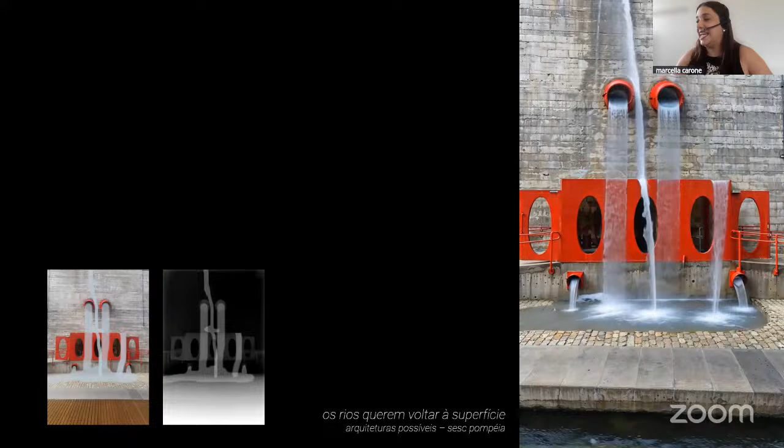I went there to Sesc Pompeia, I took this picture, and I tried to modify on top. So always related to the context. And at the end of last year, I started thinking, how can I express myself through those images and videos?

So Sesc Pompeia is built on an area that used to be a river, and it's an area that floods today. So those red tubes on top, they are for ventilation. But I was thinking, what if water comes through them, like the rivers want to come to the surface? And I started building some of those images and videos.

And I was really, really focused on how to get consistency, because I know that consistency is a difficult thing to do in AI if you work with single images. So how to do this? And it was really nice for me because I was using ComfyUI and ControlNet, where I can extract information from the photos, but I can draw those maps as well. So I was drawing where the water needs to be for me to render it and have the video.

But at some point last year, I was thinking, can I really design with AI? In that moment, I was just working on top of other images and trying to express myself, understanding the tools. But I was thinking, can I design something, not just ideas, but can it be true, going from the digital to the physical world?

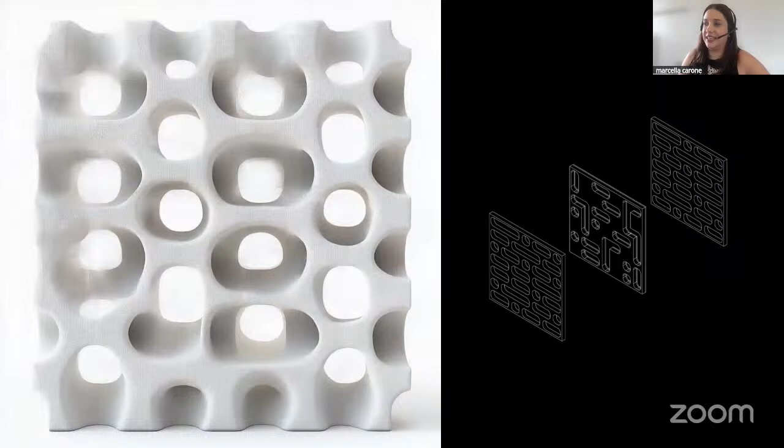So I can give some commands. I can put my ideas and my references here. They are not generic, but I'm not 100% controlling the design. I can get ideas from it. So this started evolving for me, and I got back to Rhino in a more traditional way to understand how those elements can be combined, where I can get openings and closings,

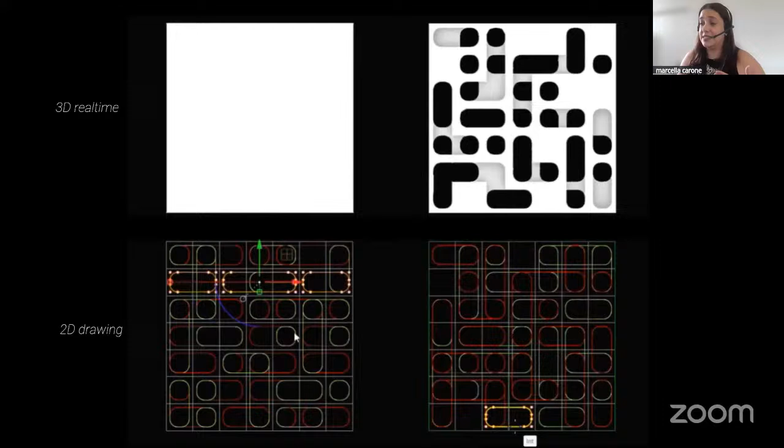and to have a super straightforward algorithm, so I can design and see real-time 3D at the same time. You can see the red lines and the green lines. I was drawing the front and the back at the same time to get real-time 3D of my cobogós, even seeing the percentage of the openings and everything. So I could get a range of different designs and combinations.

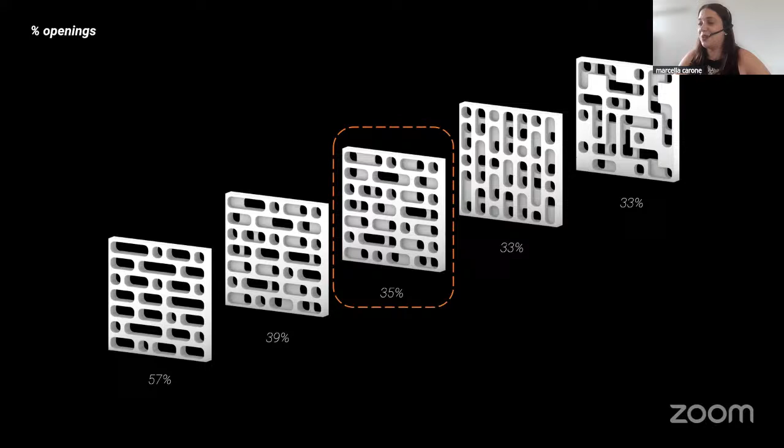And I'm going to show you here, I have the prototypes. This is work in progress, but I have the prototypes. I have many of them. They are in scale here. But there is one thing related to this for me: I can touch the design. It's not just an image. So I can evolve from it and really work on it. I'm going to get just this middle one, 35% opening. So I can go even further.

I can have solar analysis of it. I can really test this material digitally, to understand the incident radiation of the material and the luminous performance related to, in this case, the São Paulo climate. So I can see that I can reduce the incident radiation by 3 times, but at the same time, I can have the light come through it. So it's a powerful element. And for me, I was thinking of a novel way to do it.

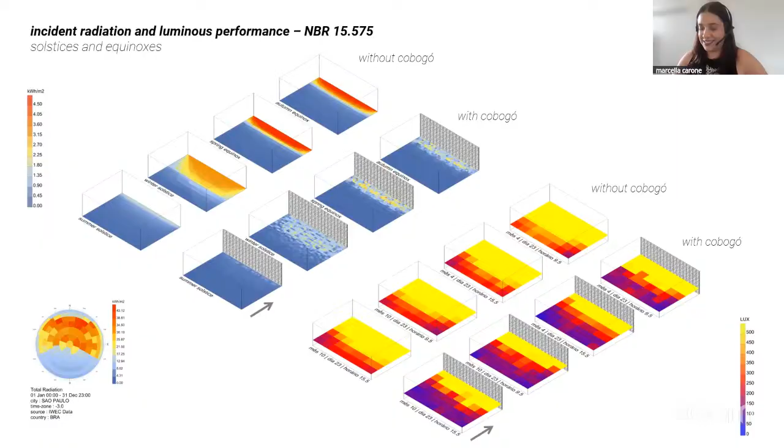And for me, this workflow process with AI is fascinating because it's not going from the beginning to the end; it's like a dialogue between me and the machine. All the time we are talking, and when I got the design, I put it back into AI to have the lines, and then into Rhino, to get into the real project. So I can express myself,

and it wasn't a super fast workflow. This is really good to say, actually, because people think that it's super fast. Okay, it's super fast if you have the workflow. But I was trying to put in my original workflow of creation as well, being a hybrid creative.

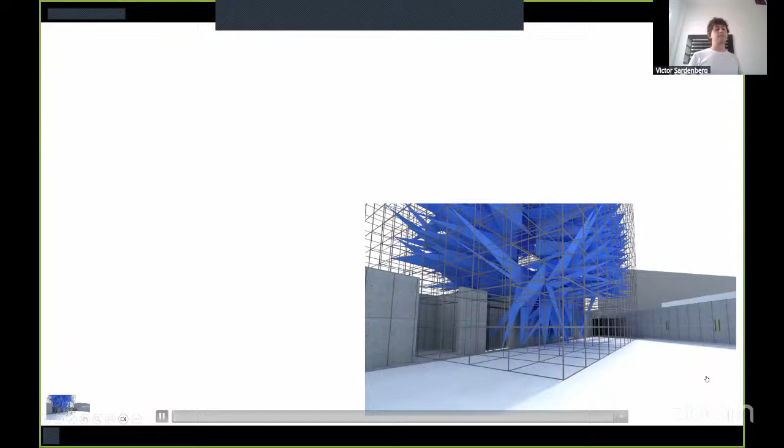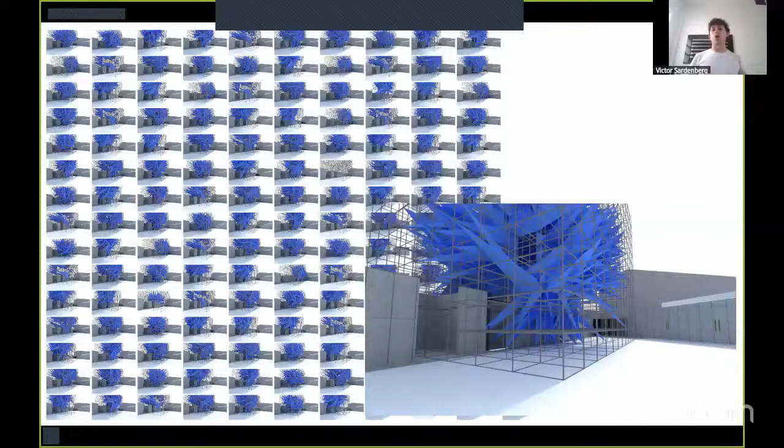And this interest started to me because in the last decades, it became very fast and cheap for architects to produce hundreds and thousands of variations of designs. And then the question arises, how do you choose among all these almost infinite options? So traditionally, architects have been using quantitative methods to rank designs and navigate this design space of all possible solutions.

And if you fit the existing criteria to the good and old Vitruvian triad, you can see that all of them, or most of them, fit into firmitas, which is related to structure, or utilitas, which is related to the use of a building. However, there is a very important question, which is in the core of architecture as practice and as discipline, which is how something or an environment is perceived by its users, which is related to venustas, that is aesthetics, how we perceive the world. So it's necessary to develop methods to quantify aesthetic preference.

There's a long tradition of people trying to do it in something that is called empirical and quantitative aesthetics, from Fechner, a German physicist from the mid-19th century, until nowadays. Someone that is especially interesting for me is Birkhoff, who in 1933 developed the first formula to quantify and compare aesthetic objects like poetry, music, and objects. And nowadays, there's a resurfacing interest in aesthetics that emerged from the combination of contemporary computational techniques applied to visual perception in a new field that is called computational aesthetics.

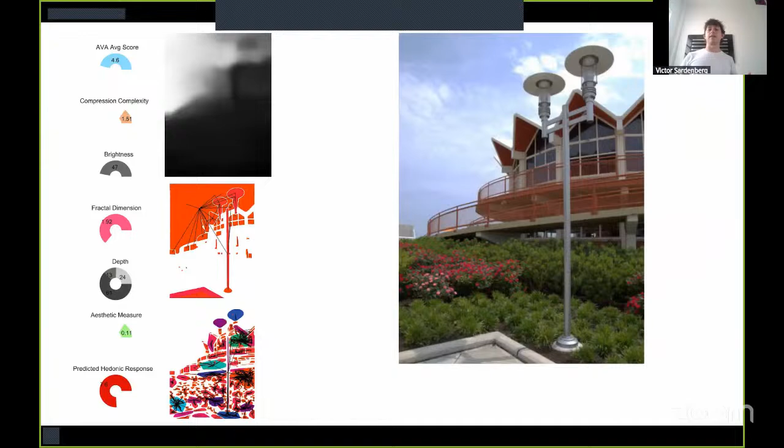So here's a nice definition. Computational aesthetics is the research of computational methods that can make applicable aesthetic decisions in a similar fashion as humans can. So here is an application of many computational methods into a large database of architectural images. It's applied to AVA, which means Aesthetic Visual Analysis Dataset. It has 255,000 images, and it's a very good dataset because it also contains the aesthetic score, or how people like or dislike each image. For architecture specifically it is 16,000.

So here are some computational aesthetics methods applied to this dataset, like compression complexity, the brightness, the fractal dimension of the image, the depth of it, the number of parts, their connections. And on the bottom, there is a neural network that I trained that is called the predicted hedonic response model. This model is a large neural network that uses as inputs some computer vision or computational aesthetic methods like brightness, depth, fractal dimension, number of parts and connections. And in the output of it, there is a predicted hedonic response. A hedonic response is a response of liking or disliking something. So this neural network is able to predict how people like or dislike architectural images.

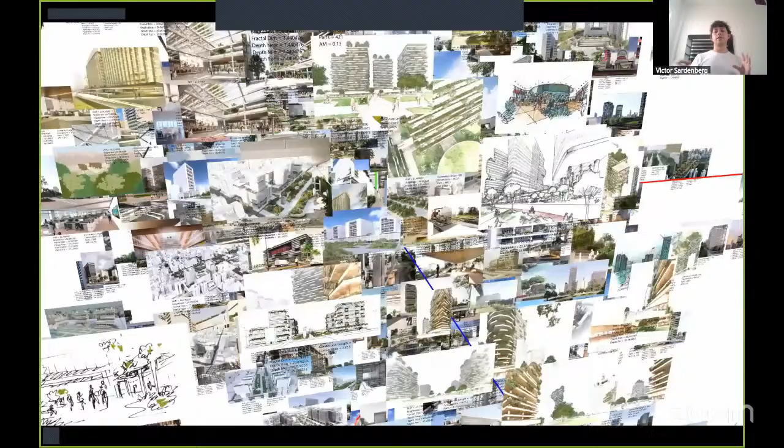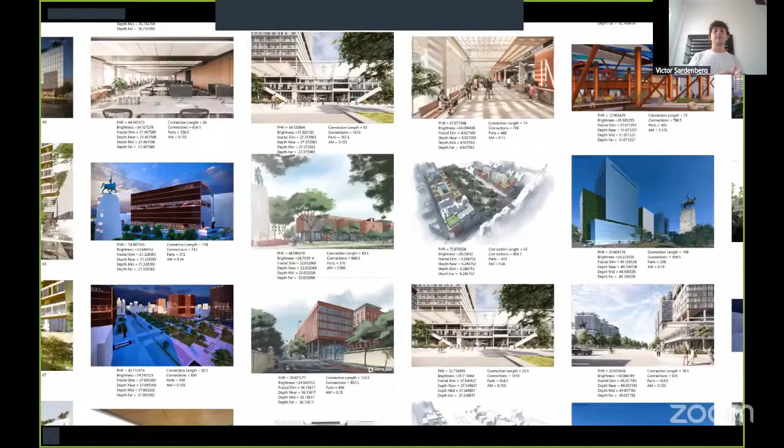So I use all these 14 criteria, and I use PCA, which is an analytical method to flatten 14 dimensions into 3D and 2D. So this is a map that clusters images that are similar and moves away images that are dissimilar. These are 600 perspective images for the competition for the new headquarters of São Paulo government in Brazil. And it forms a very large cluster in the center, but there are in the periphery some different designs. Here is a different visualization that puts all images in a grid, but still organizes them according to their aesthetics. So this is a way to understand the different aesthetics that are being applied in a design space, for example, in this case, a competition.

But something that I realized is that this large cluster in the center is formed because most of the images being submitted to this competition have the same aesthetics. These are the 6 finalists of the competition.

And you can see that although the designs are very different, the aesthetics of the image, they are all very similar. They all belong to the aesthetic category of the beautiful. It's always this beautiful green grass, this very nice blue sky, some happy people, there is some specific brightness, specific camera composition.

So it made me feel like in other aesthetic practice or other arts, like movies, if you go to the cinema, you can see that there are many genres of movies, from horror to comedy, from antique movies to sci-fi, from tragic to comic. Or if you look at music, you have from heavy metal to bossa nova, from drum and bass to minimal, there are many different aesthetics.

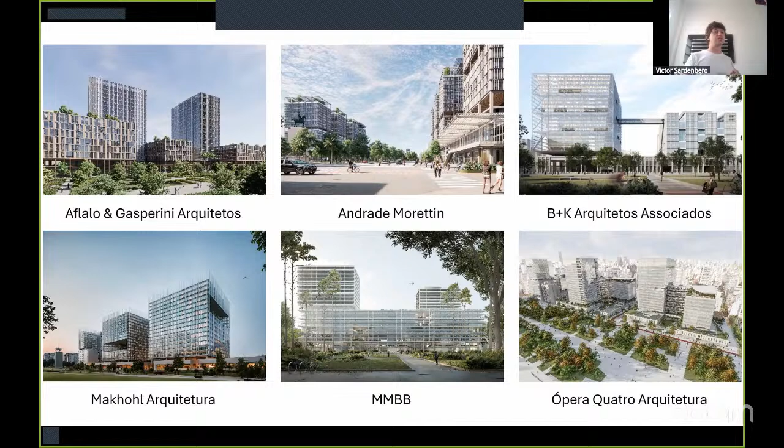But it feels like architecture, especially in the mainstream, has been producing only one aesthetic category, which is the beautiful. And I suspect that it happens also because software for rendering comes with templates of this kind of image, the beautiful photorealistic image. And it pushed towards this direction of the beautiful. So I started to research the following question: can the current AI models explore aesthetic categories beyond the beautiful?

So in the last AA workshop here in São Paulo in July, I had the opportunity to learn Stable Diffusion and ComfyUI better, and I started to apply it in this research. So this is one of the images from this competition. This is designed by Makhohl Arquitetura. And I extract the depth of this image and the lines that define the composition. And I start to ask, can you make a beautiful version of this foyer?

Can you make it comic, or what it looks like if it's a cool foyer, or a cute foyer, or a glamorous one, a grotesque one, an interesting one, a kitsch one, a maximalist or minimalist. Here is a picturesque, here is quaint, sublime, surreal, tragic, ugly, and finally zany. So as you can see, the AI model is able to produce these existing categories that are popular, or not so popular, in other fields, but not in architecture.

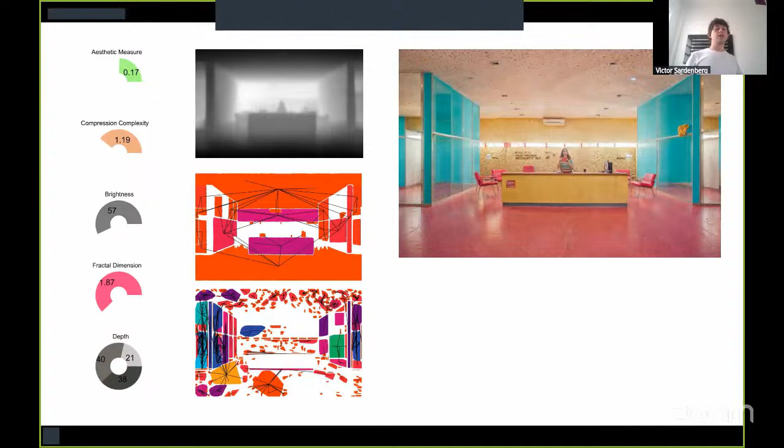And you can see that some regions of this map are very well populated and other regions are less populated. And this is what I think is more interesting in this map: not to check the regions that are full of images, because these regions are populated by images that have the aesthetic categories that we are already familiar with, like the sublime, the grotesque, the beautiful. But there are also many regions that are empty. And this is the next step of my research.

How can I populate and find new aesthetics, new sensibilities that are unique for our time. And I think this is especially interesting to do with artificial intelligence because it becomes an act of co-creativity. I'm creating together with the model. And it's possible to produce new aesthetics, synthetic aesthetics that we still have no names for. We still don't know how they look. So the next step is to find these new, uneasy, unexpected, maybe uncomfortable, new synthetic aesthetics.

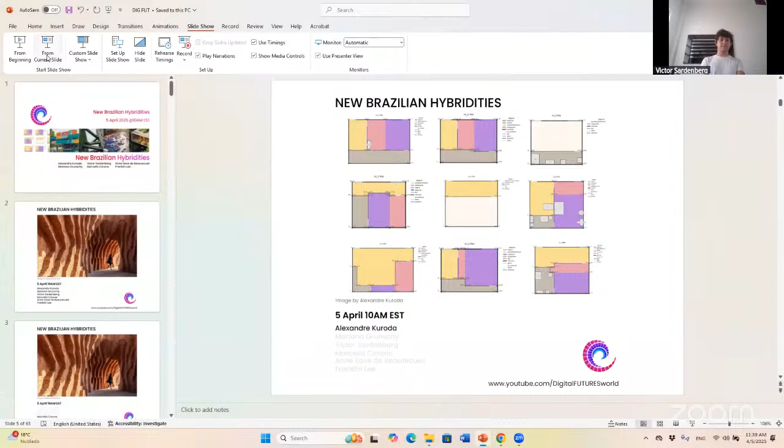The next speaker will be Alexandre Kuroda, who's the founding partner of ArcGen. He holds a master's degree from the DRL, the Design Research Laboratory at the Architectural Association, where afterwards he worked for Zaha Hadid, working on parametric design on these amazing facade systems and structural systems for her buildings. And he also worked for KV Arquitectos. He was an undergraduate and postgraduate professor at the Faculty of Architecture, Belas Artes. Actually, I think you founded the amazing new master's program there that was focusing on parametric design. And he's been a speaker at events such as XSW, the Bartlett, and KEA.

ArcGen, I think, is a fascinating practice that he's created that establishes a certain critical contextuality in transforming static urban planning regulations and interior area requirements to create this dynamic form generative process. So we're excited to hear more about your work, Alex.

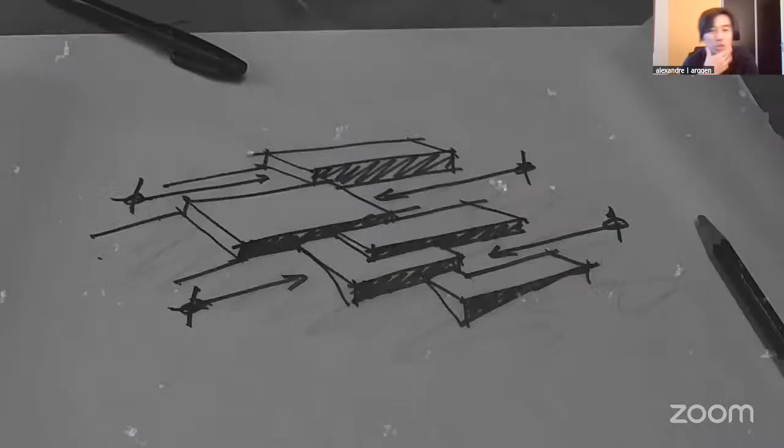I want to start this presentation by presenting something that we architects already know. We architects traditionally solve everything on trial and error. All of this to test all of our intentions for the projects in plans, sections, elevations, and perspectives, at the same time complying with all the accessibility, urban and environmental restrictions. We grill our minds thinking and drawing by hand or digitally in AutoCAD or BIM. So traditional architectural services are very manual, inaccurate, bureaucratic, and slow.

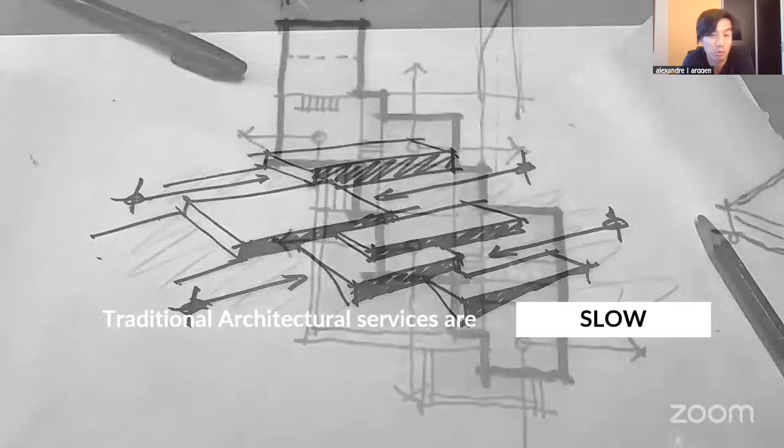This is a colossal problem for retail and real estate companies that need these projects with speed and quality to meet their business demand. That's why we automate architecture and urbanism design, custom made to our clients via AI and generative design algorithms that we developed here with our team. We've got two main solutions for our clients.

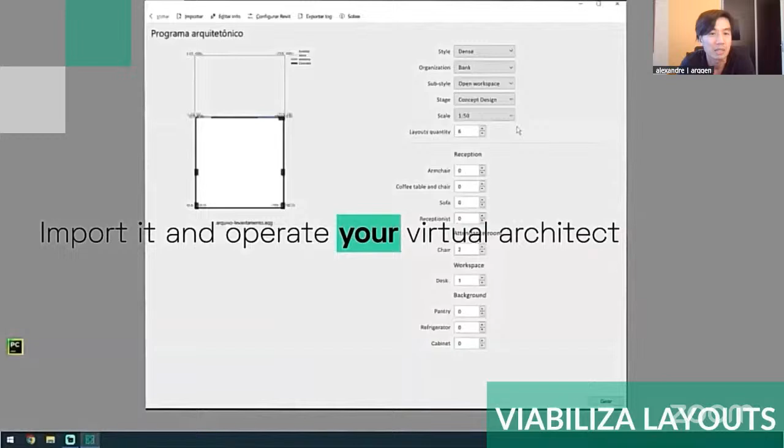The first, Viabiliza Layouts, came to light from the pain of approving architectural layouts. And this is how it works. It all begins by importing the building survey and then defining the design style and the architectural program. That is, for example, for a bank branch, the quantity of managers, the back office furniture, waiting chairs, and then in one click, launching our solution that conceives all the possible layouts for these sites.

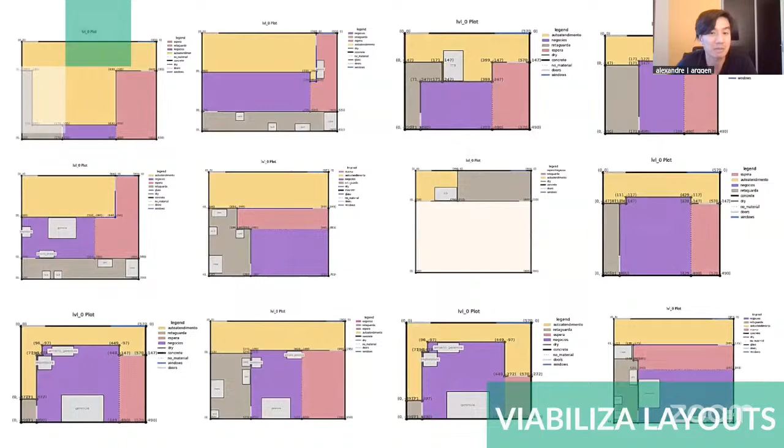All the design options are presented and ranked according to the client's criteria, complemented with all the metrics needed for the users to always make the best possible choice, and exporting the selection in PDF, AutoCAD, or BIM. Our software is agnostic. We integrate with the main applications used in the market.

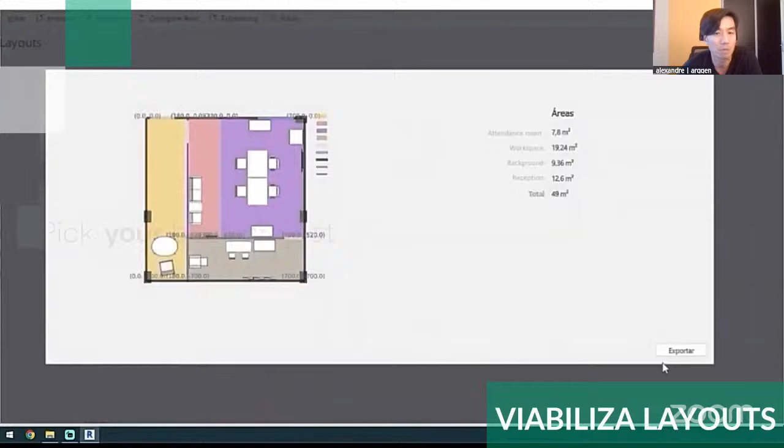Revit, for this client, means that beyond all the benefits of the BIM model, it is obviously a 3D model that allows for an easier comprehension of the design presented, also including the automatic generation of the drawing sheets with plans, tables, and dimensions, therefore delivering the projects in a complete schematic design stage.

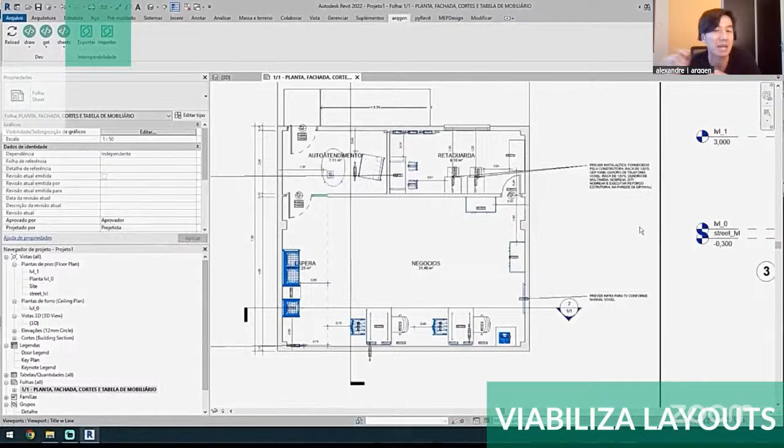One of our clients has reported an approval time reduction from months to less than a day, an increase in the quantity of design options to more than 10, while, as we know, a traditional architect will deliver 2 to 3 options and will charge if you ask for more, because obviously it demands a lot of work, and savings of millions due to their more than 4,000 branches here in Brazil alone.

Our second solution is Viabiliza Terrenos, that came out of the pain of approving test fits for residential, commercial and warehouse buildings in their plots. It all begins by importing the site survey and then choosing all the urban and environmental restrictions such as setbacks, GFA, GIA, building heights, and the architectural program from our clients. We customize our solution with our clients' characteristics, that is, their apartments, their accesses, amenity areas, car park, and then with one click, starting our solution.

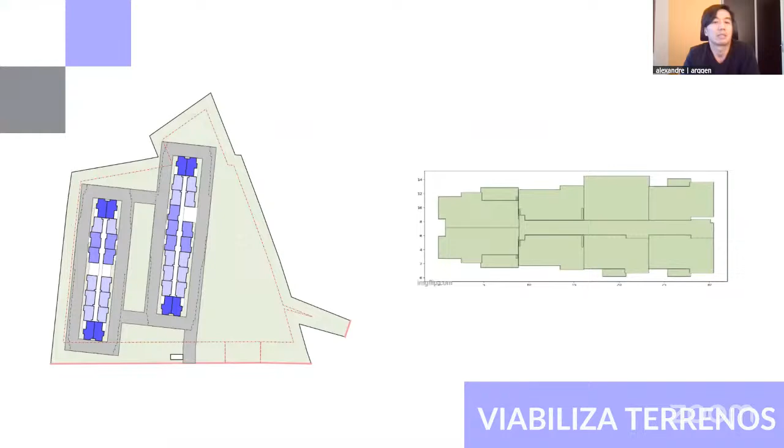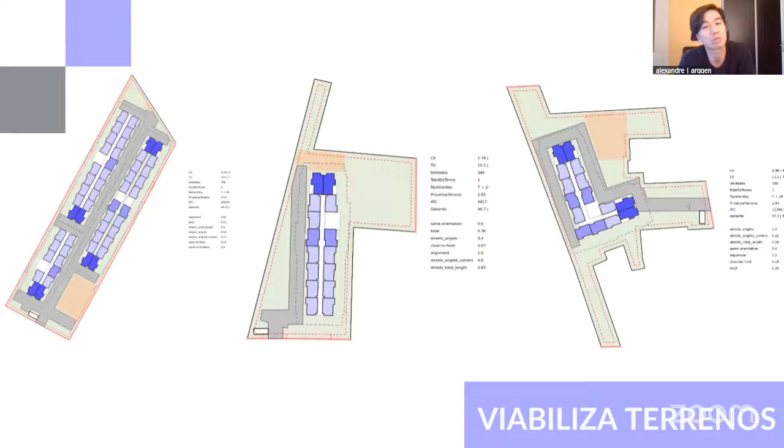Here, our solution is positioning residential towers and varying the typical floor. And here in different site conditions. And just like Viabiliza Layouts, delivering all the best design options possible. Once the user chooses, he or she downloads the options in the format that he or she works in.

And one of the Viabiliza Terrenos clients has reported a time reduction from days to a few minutes, an increase in design options to more than 5, and also an increase in the scores of 5 points on average compared to the projects already developed, during the POCs that we have developed with them. This is only possible with our team.

Myself, one of the Arqgen's co-founders, I'm the Chief of Innovation in the office. I have my master's degree from the Architectural Association, from the DRL, as Anne said, and worked at Zaha Hadid and lectured here at the Belas Artes School of Architecture, together with Thomas, my partner, the current CEO. We both graduated here from Mackenzie University, where Marcella and Victor also did, where also Thomas got his master's, and a team of 30+ architect developers, computer scientists, AI, sales, and marketing specialists, all of them very passionately committed to overcoming this colossal challenge.

We are also recognized by our partnerships. We are financially supported by FAPESP for PIPE Phase 3 and FINEP. We are technically and commercially supported by Autodesk. On the AI tech side by NVIDIA and AWS. And by our investors. We are now 1.5 years into the first round of seed investments. And last but not least, our dear clients, among them Bradesco and Itaú, one of the largest banks here in Brazil, users of the Viabiliza layouts, Cury and Direcional, top-notch real estate companies here in Brazil.

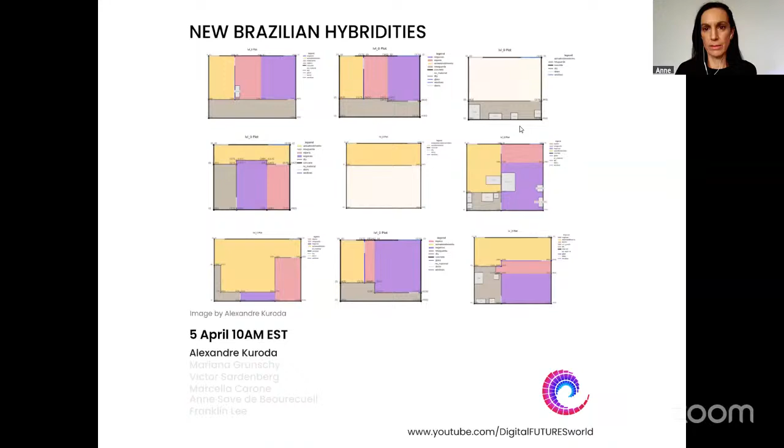And so our final speaker is Mariana Grunschy, who we were introduced to in preparing the Architectural Association Visiting School program. She was potentially going to participate as a student, but we discovered that actually she has a lot of experience using AI. She has over 20 years of experience with architecture, design, and immersive brand experiences with her company, Soma Creative Studio, working with commercial spaces, events, and temporary installations. She has an interesting dual degree in both graphic design and architecture from the Faculty of Architecture of the University of Porto in Portugal.

Thank you so much. Good morning. Thank you so much, Anne, for having me here. Also, Neil. Sorry, are you seeing my screen well? No, hold on. Let me stop sharing this one and share the other one. Are you seeing my notes also, or just my slides? Okay, I will share in another way. I don't want to show you my notes, only my presentation. Now you can't see my notes, right? Okay, that's it. So thank you, Anne, for having me here. Thank you, Neil, also.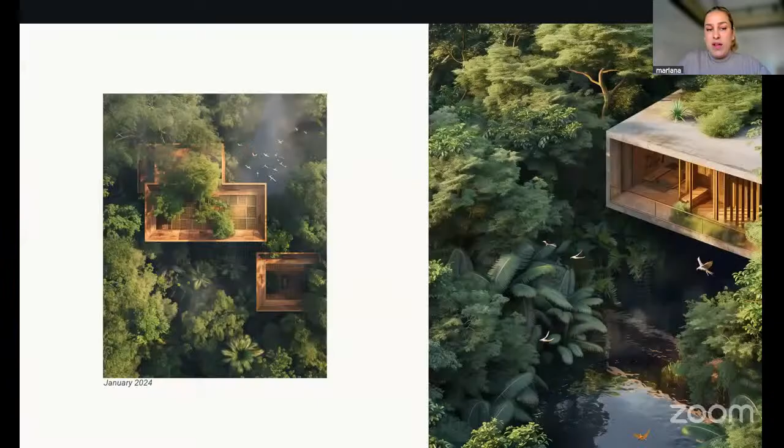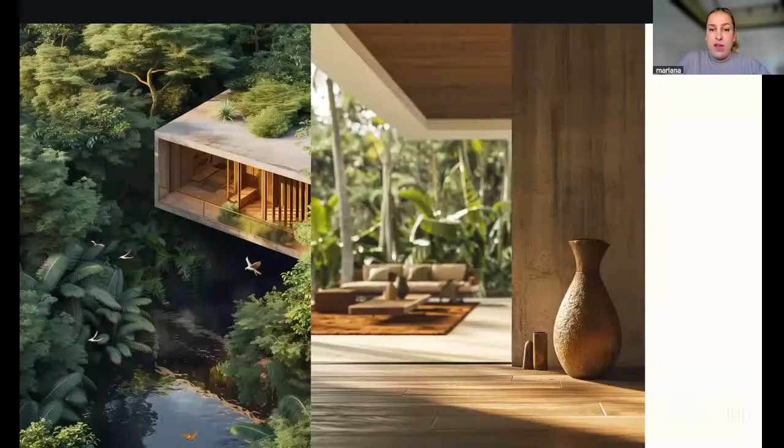So back in 2024, I started to do an Amazon AI series, and I would like to present Brazilian architecture inside the nature, different from other images I was seeing at that time. I was not seeing a lot of ways to show Brazilian architecture. And these houses I did in January last. They are open, very open. They have exposed concrete. They have ceramic. They have indigenous art. I was not able to see that kind of projects in artificial intelligence, because I was only seeing European and American ways of making architecture.

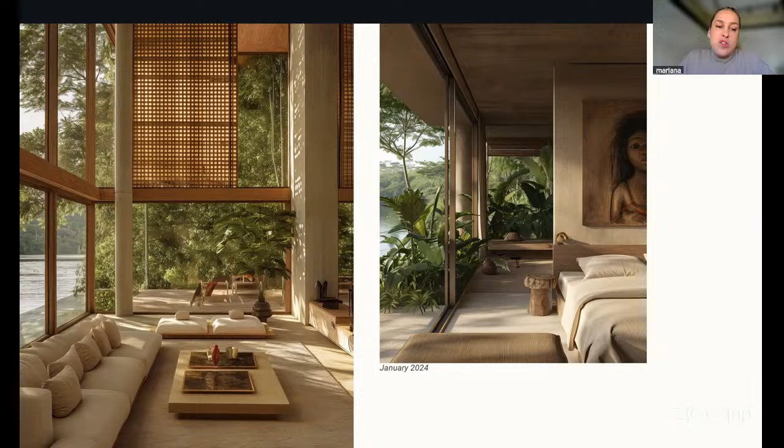These other images. Maybe if I started to do this series again, I could have more accuracy in the images, because we have the technology. The technology started to be more realistic nowadays. But I decided to show the images of that time, because they mean a lot to me, to use the Brazilian nature, the materials we have a lot here in Brazil, the birds and everything else.

Oh, sorry. Why is that happening? Why is that happening? Present full screen.

Also, I have a more clean kind of image and materials. I always like to show humans inside my images, because we can have the sense of human touch and also human shape and human size inside the space. These are another kind of images. It's also a critical way to show Brazilian architecture. Birds.

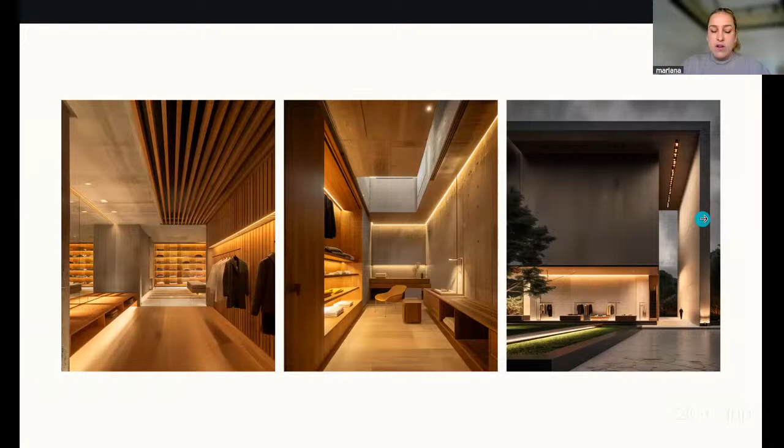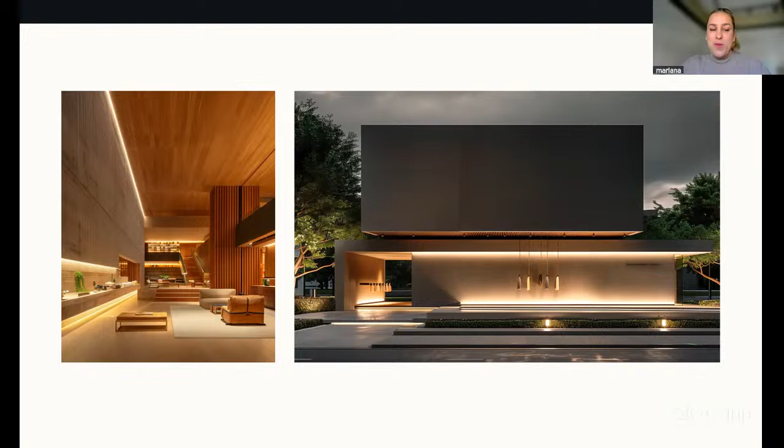And then I started to also do images of high-end architecture in São Paulo, but always bringing nature inside the spaces. I always like to bring nature inside the spaces. I like the brutalism of exposed concrete and design furniture, and that kind of spaces. I think they match really well with nature inside of it. This is another image inspired by Brazilian architects. This is another image. Another kind of images. This is São Paulo. This is my view of São Paulo. Another one. I always like to use some artwork in my images also.

And for me, as I told before, the way I think about AI is not only about technology, it's about time, it's about human connection. And these images are only a way to share my creativity and my own view of Brazilian architecture and Brazilian spaces. But my way to work with AI is to use AI in the whole field of architecture, also using ChatGPT for my texts and everything else. Other images over here. Two images in here.

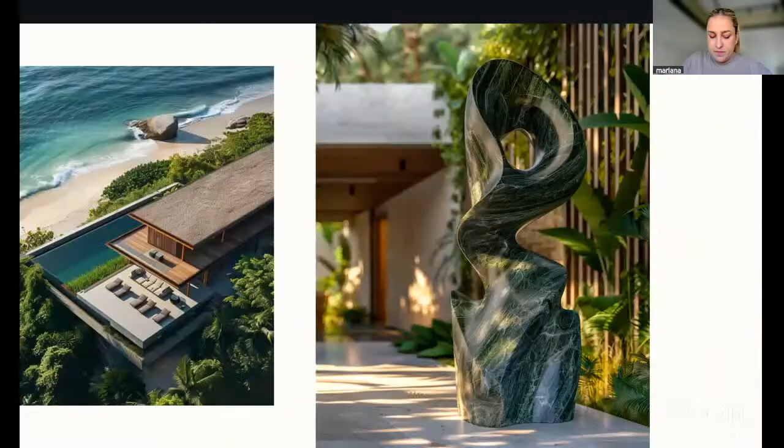Then I started another series, the Brazilian House series, where I like to show houses by the beach, also inspired by Brazilian architects. I like to show some sculptures with Brazilian rocks too. This makes my imagination. I think for all of us, AI can materialize what we are thinking, what is in our architect's mind. That's also a way I really like to use AI, to materialize what I am thinking. So I can put what is in my head in an image.

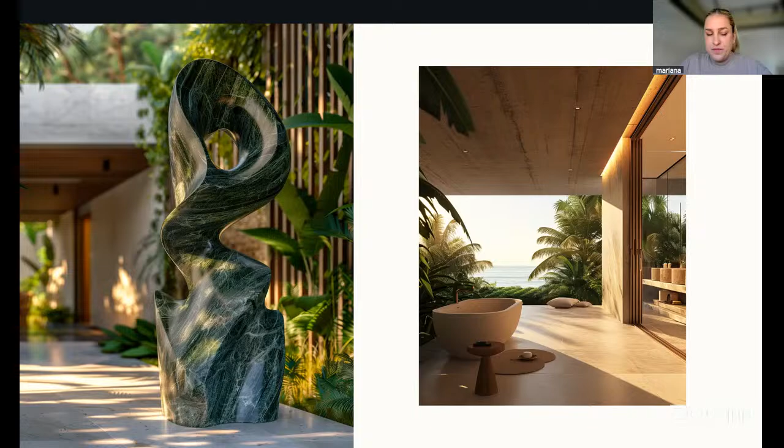And that was difficult for me, because I don't like to render images. So when I started to make images, it was great for me to see how the light touches a material, how the light touches the nature. This is another image. Another one.

So I try to use my AI work as a kind of critical contextuality and to bring more time, more creativity and more human touch to my work day by day. So Brazil, with its diversity and contradiction, is a powerful ground for that. And that's it. Thank you.

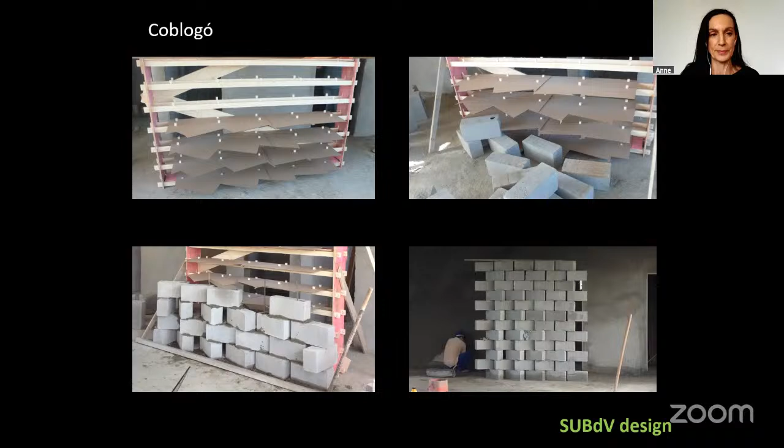Last year, as I mentioned earlier, we worked on the River Pinheiros, and we were privileged and honored to be taught by the lead tutor, Carlos Bañón, an amazing architect working with artificial intelligence, who was able to teach us how to blend with AI issues of context and references for ideas that could improve the situation of the river. And so I will show 4 projects which I think embody this idea of developing a critical contextuality, blending both references and ideas with the way that the site is working in the context and culture of Brazil.

The first is Dora Hausch. She titled her project Imagining Ancestral Wisdom in Sao Paulo, Artificial Intelligence Against Extinction, looking at the lack of connection systems, the harsh edge conditions of the river. The river is being cleaned. There are some new bike paths. The city is in a mode of improving these different kinds of connection systems.

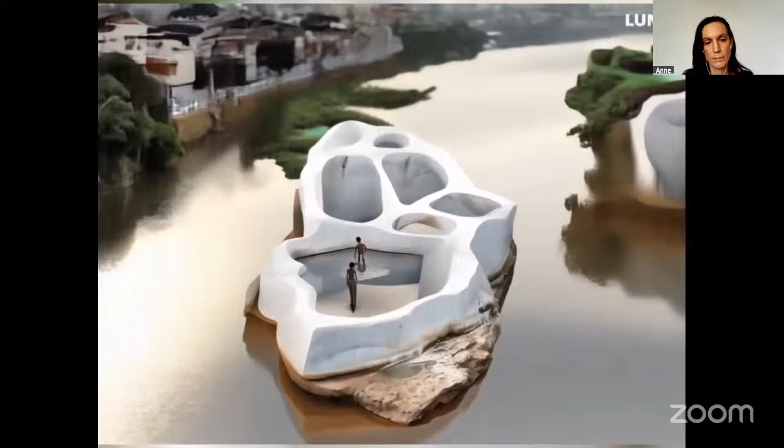Right, so that leads to this summer's, or winter here, 2025 workshop. It will be with the super amazing Hassan Ragab, who works on creating a provocative narrative that tries to create an authentic representation of cultural identity within the work that he creates. He entitled the workshop Latent Space Paulista, Architecture Beyond the Intangible: Urban Identity, AI, and Computational Design.

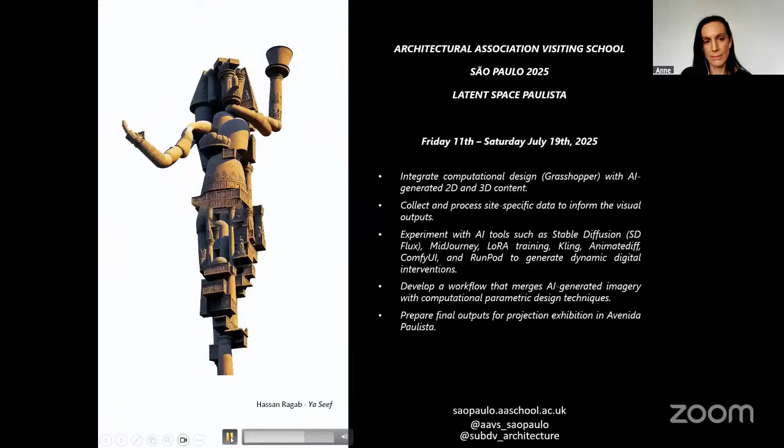Well, thanks, team. That's what I expected. I expected this vibrancy from Brazil, and this kind of plurality of different approaches. I think the one thing I'd say is that if there is one country in the world that is really truly hybrid, it is surely Brazil itself. And there was some astonishing work there. I was left with lots of thoughts about this.

What was interesting was all of you are involved in education, even though some are working mainly in practice. Everyone's somehow involved in education, and we finished off with a very sort of educational thing. And I think, to my mind, that is the big question right now. Whenever I go to talk about AI, people say, "What about education?" Because what you're dealing with really is, we're educating people for a future. We don't even know quite what that is, and there are lots of challenges when AI can generate images, it can generate essays, and God knows what else.

All sorts of challenges, and it's not just simply a question, I don't think, of just adding AI and stirring. This is a comment that Joseph Choma makes, who is the director at Florida Atlantic University. Don't just add AI and stir it. You've got to think how AI is going to reconfigure everything. And I think practice itself is going to be radically reconfigured. And we got some glimpses of that. For my research, I've discovered that some practices are just using AI to produce images, but others are using it to really speed up the process. Foster and Partners are really looking at that kind of approach.